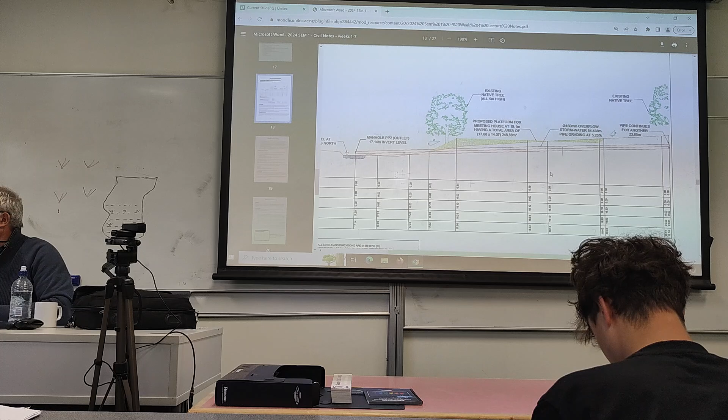Have they done an assumed level? No, but they haven't done an outlet structure either. Outlet structure's missing, just the pipe going into the water. Most other things are pretty good, but there's no grade on there.

Now remember, the grade is only shown where the knife cuts through the pipe, or the cross section cuts through the pipe, to where the end of the dash lines are. So if the pipe's going on that angle and you cut through it, but you can still see pipe in the ground in the distance, that's the bit you grade, not the whole pipe.

So it's talking about multiple cross sections, which you're going to be doing for your assignment. I'll do one in class, and then if there's time I'll show you the only thing you need to do in terms of your volumes. In fact, I think I will go through and do that. Oh no, that's next week on the volumes. But I'll show you how to do what I call a line drawing or a stick drawing of the cross sections and how many of those I'm expecting you to do.

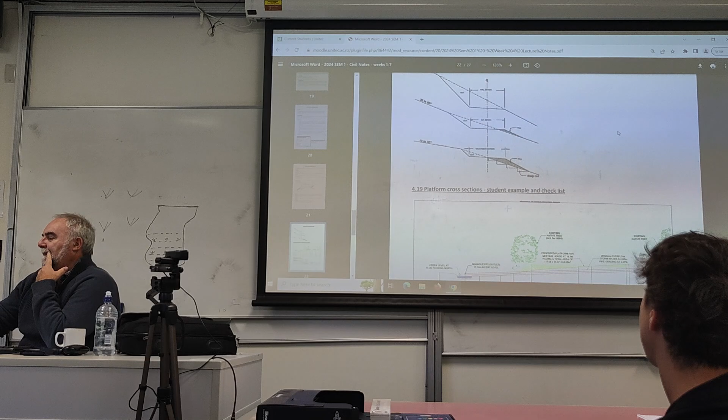It's the same drawing again there, and a checklist. Have you shown a datum line for your cross section? Well, that was on the long section, the datum line. Have you dimensioned the platform on the cross section? Have you done it on your long section? You don't actually have to show dimensions. You can, if you want, do an arrow with the dimension in each way, 10 metres by 10 metres.

Remember, on your existing site plan, the platform is a proposed platform. On your proposed plan, it is also proposed, but it will become a thick line. You've got a survey line at the moment between pegs. Peg, survey, traverse. Have you shown levels for the existing ground? Have you shown levels for the design plan? What I was talking about before, have you extended the cross section to pick up enough of the features like trees, swamps, path, etc.?

Provide all cut and fill for all areas that are relevant, and chainage of the distance measured from one end, so that's a continuous distance. Subdivisions.

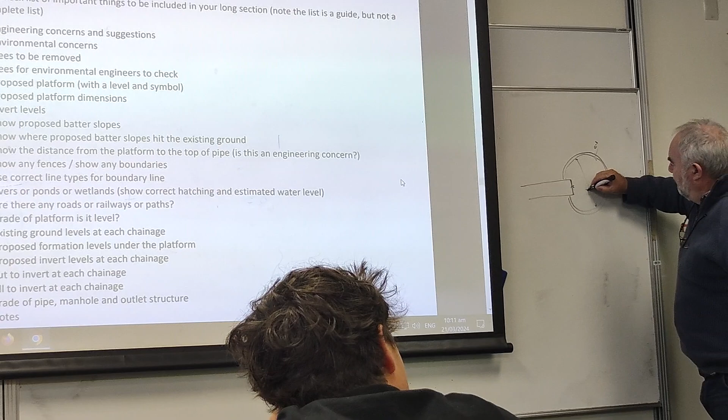So you've got a point where the pipe ends here, right? Now, your manhole goes around like this. That's 100 mil thick, 0.1, and that radius of the manhole from there to there is 1.050. You can't put your lid there, so the lid can go anywhere from here around to there. So I'm just going to put it there, and that's 0.6.

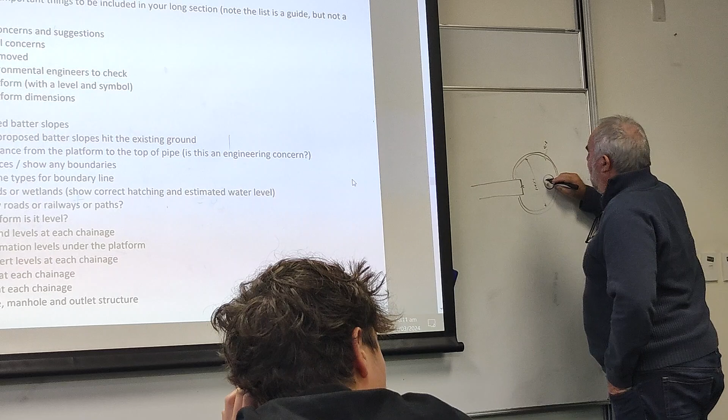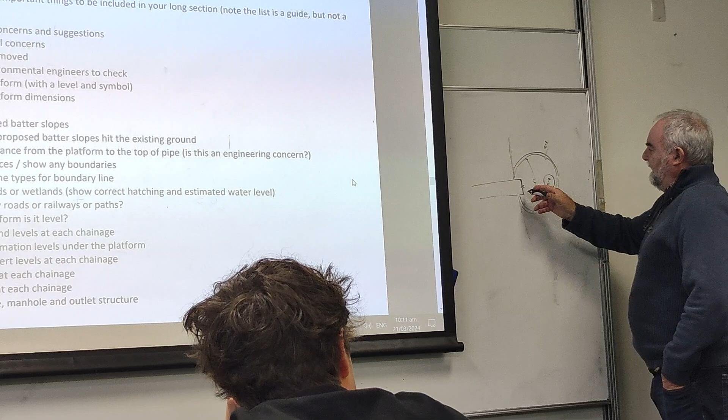And you'll find somewhere around about here is where your ground line is going to go in plan view. The pipe's way down the bottom, but this manhole should protrude. Actually, it goes through there like that, doesn't it? The manhole should protrude in by 100.

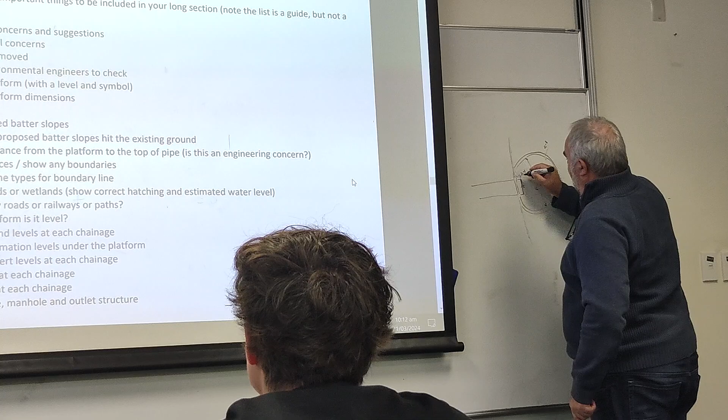And at the other end, I gave you the dimensions for this. There's the survey point there, across. It's the survey point. Don't cut the pipe off. Build the structure around the pipe. Like that. That's the outlet structure.

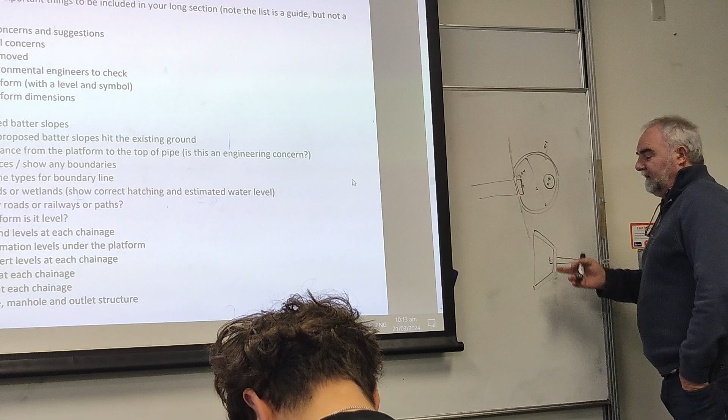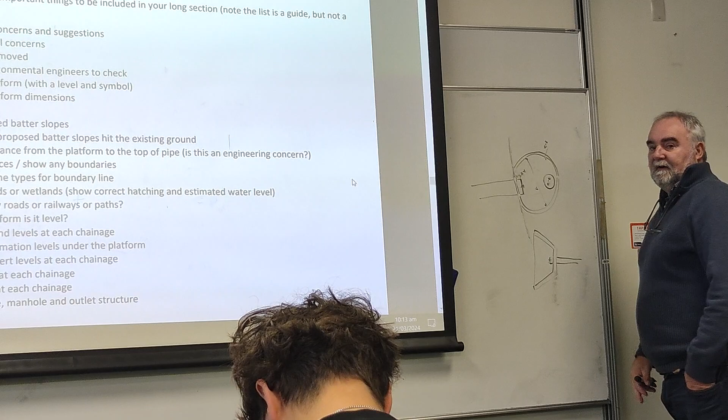Those distances I gave you a couple of weeks back. Remember that the pipe will have a centre line on it and a certain line type around the outside. So will that. Because on the existing site plan, all of this is proposed. Hasn't actually got there yet.

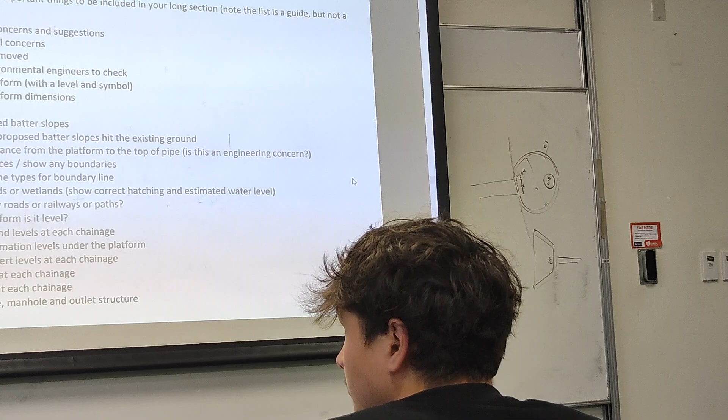When I said on the long section, the grades of the pipe, you want to put your arrow, your triangles as close as you can, and call the numbers up. Don't make the numbers little, make them the 0.35 text size. All numbers 0.35. Yeah, the only things it won't be is when you have, say, the word legend,

and then you might have the swamp, and you might have a manhole or something. You might have the pipelines. So the titles that are in that box would be 0.5 here. But any notes pertaining to these things would be 0.35. Same with the survey coordinates. You might have the words survey coordinate table at 0.5, but the survey coordinates will be 0.35.

We're going to talk briefly at some stage next week about the proposed site plan, which is part of assignment 2. Some things will be able to be copied from your existing site plan, but some things will be different. So your pipeline on your proposed won't be solid, but it's in the ground, so therefore it'll be dashed again. And you always show the centre line of the pipe in plan view, so the centre line will be there.

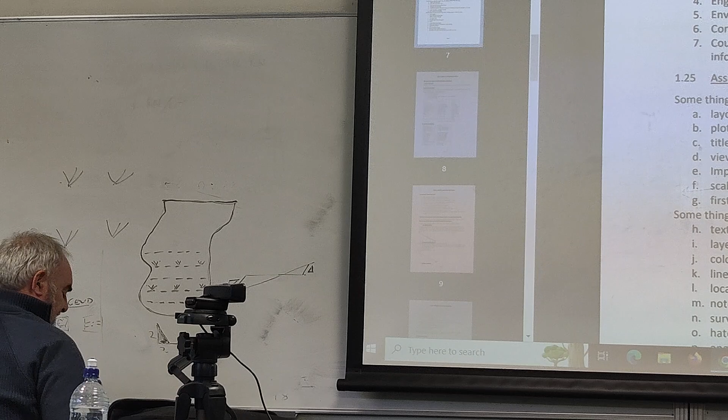So something like this. Well, proportionally 2:1. I'll make it 3:1 actually. Sounds about right. I'm just playing football with my marker here. 3:1 would be a reasonable target. So 3:1. Don't make it 3 millimetres to 1 or 3 metres to 1. Just use that proportion.

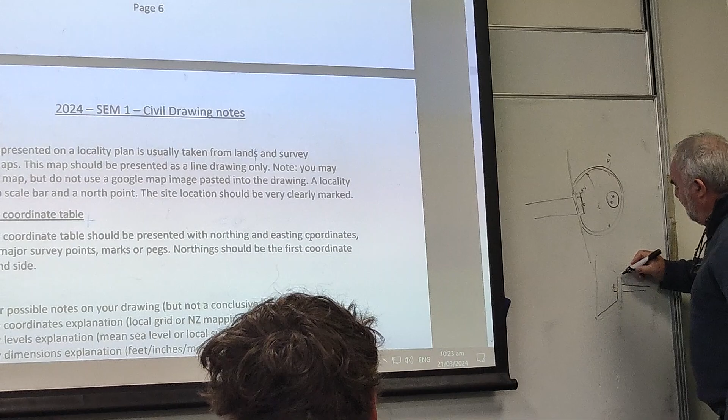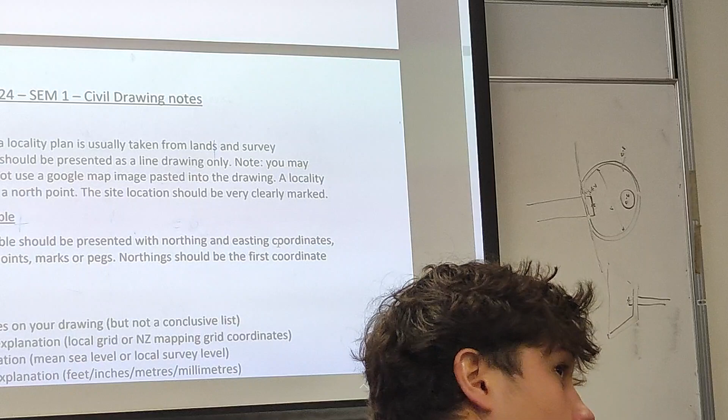Like we're running out of juice here, I might have to go and get another pen. Yeah. I'm pretty sure it was 1 metre. What do you think? Okay, can I tell her that for a second? Is that 1 metre? Yes. Just getting around for it. No, I've found one. All right. Thanks to this lady here. Thank you very much.

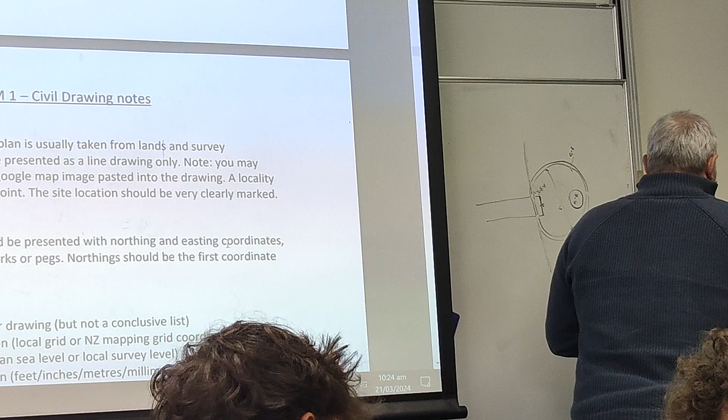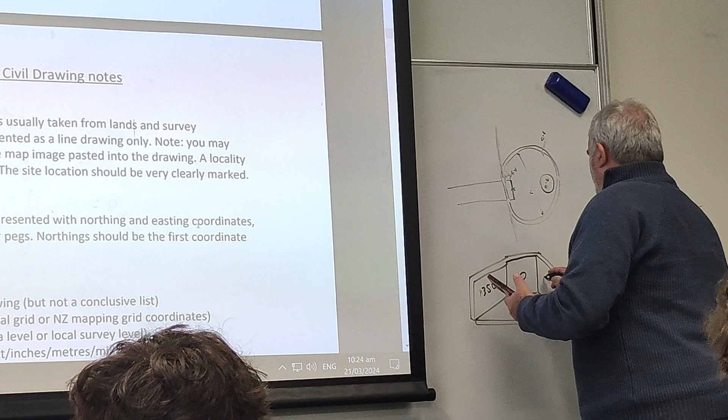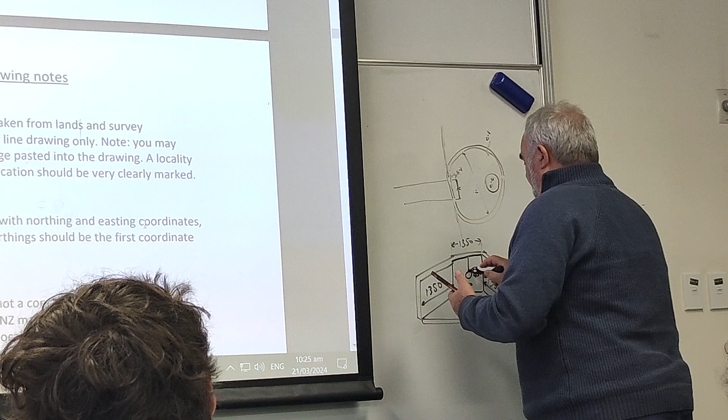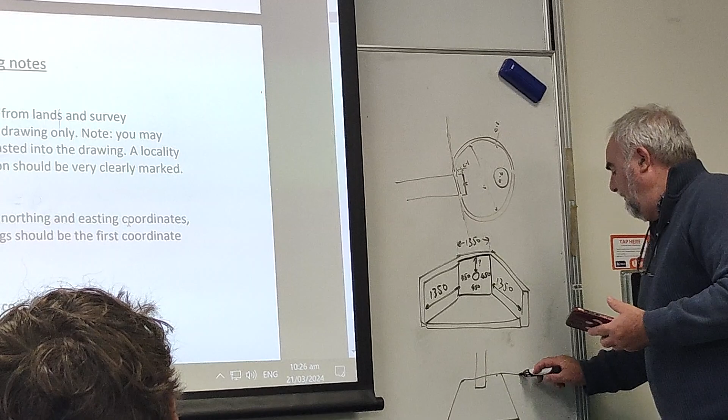Okay. So this is what I did. Get rid of that. 1, 3, 5, 0. So 1350, this angle is 45 degrees. So looking down on it, that angle there is 45. Okay?

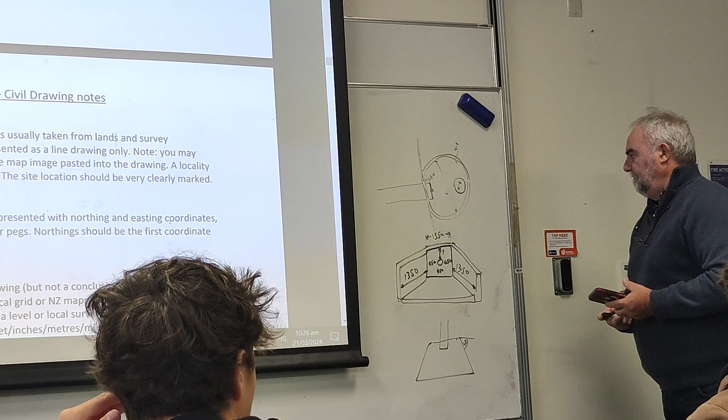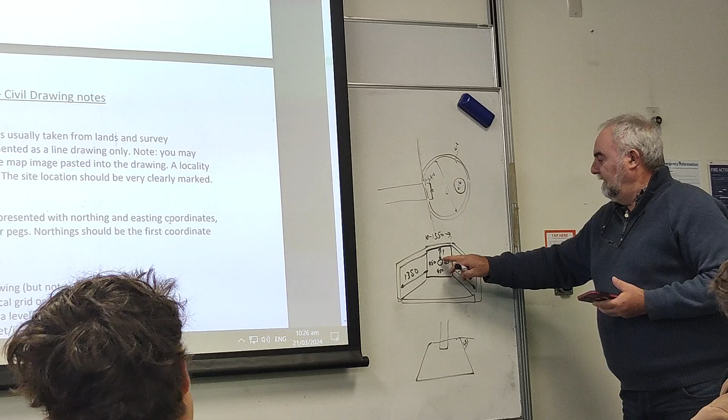And it pokes in by 100. That pipe pokes into it by 100. That's 450, 450, 450 right the way around here. Remember the pipe's 450. But that height will vary according to the ground line. So when your ground line comes down, that distance there is 100.

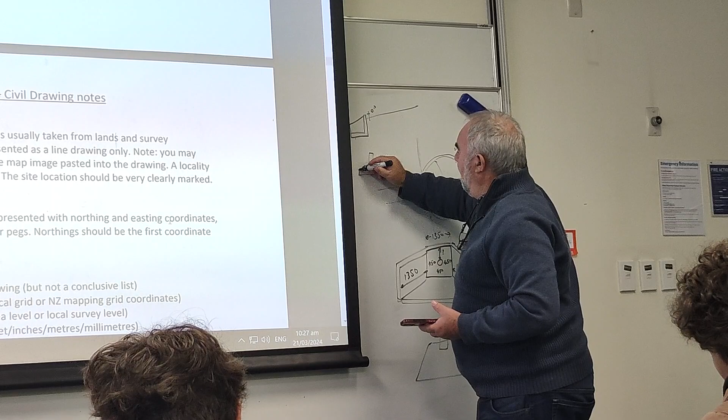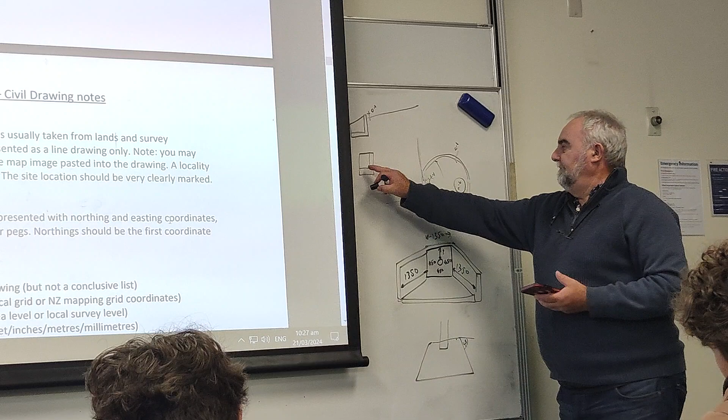And it can either go like this, or it can go like this. It's flat side. That's more common, if the wall's the same height here as it is there. Yeah, I didn't take a photo of it myself, so I was a bit worried that I was going to give you the wrong information. Here we are.

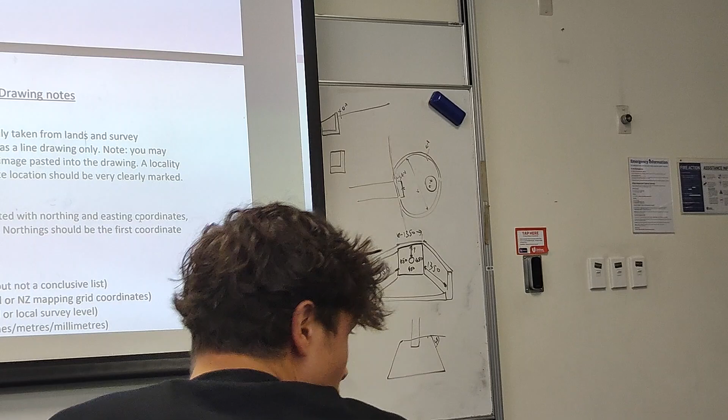For the cut and fill, the fill one should be the dashed line, right? For the long section? The line type for the cross section or the long section? Long section. So we've got Lucia coming in soon. So for the cut and the fill, what are you talking about? The dash line. So here's your ground line. There's your cut and fill. Which line should be dashed? The fill one should be dashed, right? The fill, this one. Yep.

Oh, that one, the ground one, not the triangle one. Not that one. So that dashed as well, is that what you're saying? No, I say like the triangle one should be the dashed line, right? No, because it's a long section, so it's showing the proposed. It's showing it as proposed. Continuous.

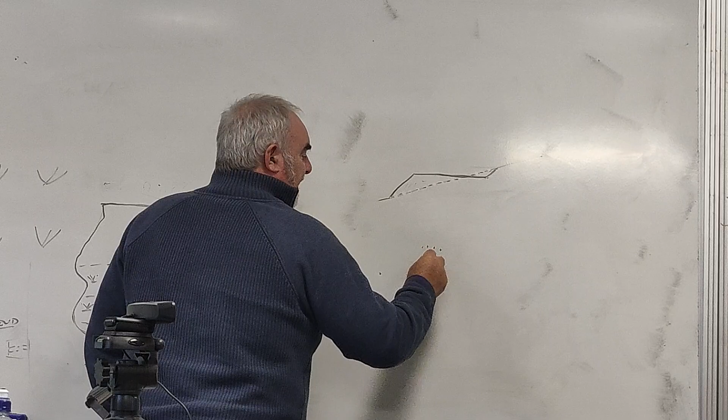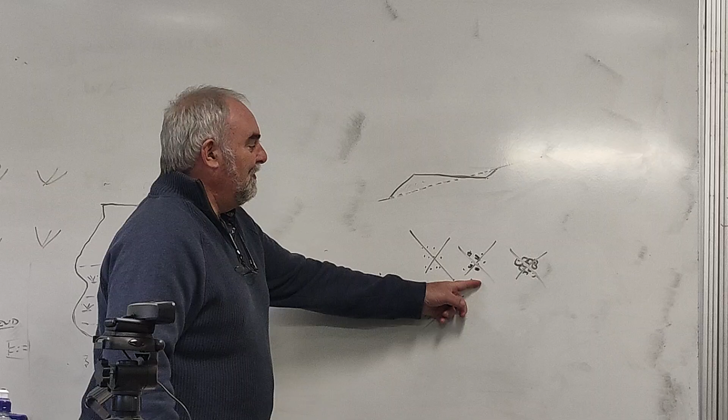No, what I said in my notes is that if you want to do a hatch like that, that's wrong. If you want to do a hatch like this, that's wrong. If you want to do a hatch like this, that's wrong. If you want to do a hatch like this, that's wrong. So you have to pick a hatch that is correct. Sand, concrete, rock conglomerate, and I've already said that's the building.

Yeah. Hello? I'll make a complaint. Oh, it's right on 10:30. I'll make a complaint.